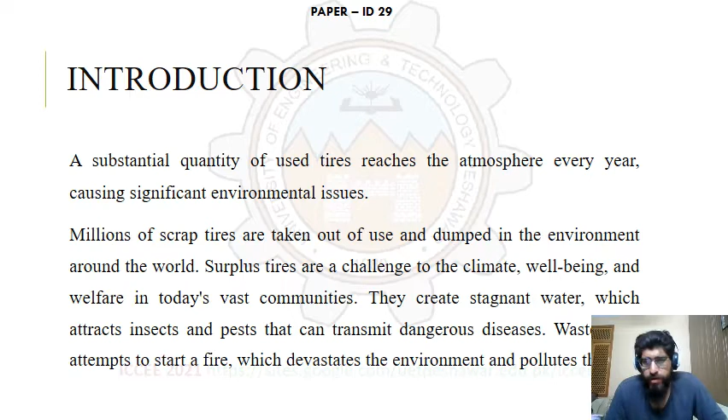As we know, tire use is increasing significantly every year, day by day, and the disposal of tires has become a major issue. It's both legal and illegal, and it's affecting our environment by causing some diseases, such as dengue, which can transmit, and also tires have fire-holding capability, which has been devastating our environment and polluting our air. So,

because of those effects on the environment, in the early 90s, civil engineers and researchers thought, why shouldn't we benefit from the properties of tires which are good in engineering aspects? So from the 90s, it officially started to benefit from tire chips in different ways. And today the purpose of our research is also that: why shouldn't we use it as a backfill material in our construction industries or in retaining structures?

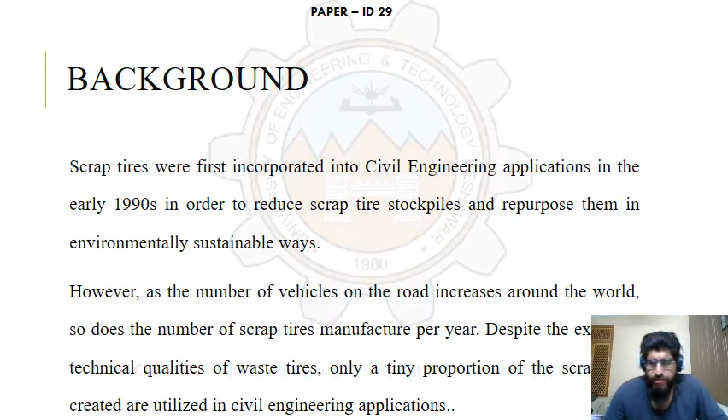So the problem statement, or the problem we have been facing, is that every time heavy backfill materials are used in construction industries or in retaining structures, which in turn increases the cost of retaining walls and other embankments and abutments. And the more critical reason is that we are using our natural resources for this kind of work. So in future we may face depletion of our natural resources.

So instead of affecting our environment and our climate by cutting mountains for sand and other materials, why shouldn't we use artificial material we already have, which is also affecting our environment? So the need for the research started from

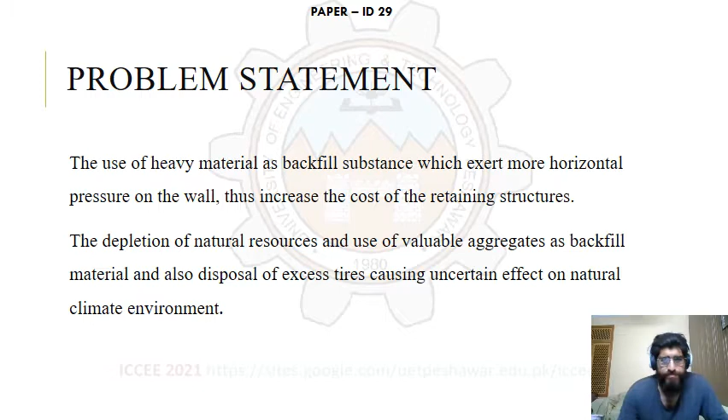this problem. And the objective of our work is to evaluate the shear parameters of sand-tire chips mixture by using direct shear and triaxial shear apparatus methodology, and also to compare and analyze both apparatuses' results, and also to use our proportion of mixture as a backfill material in retaining structures critically.

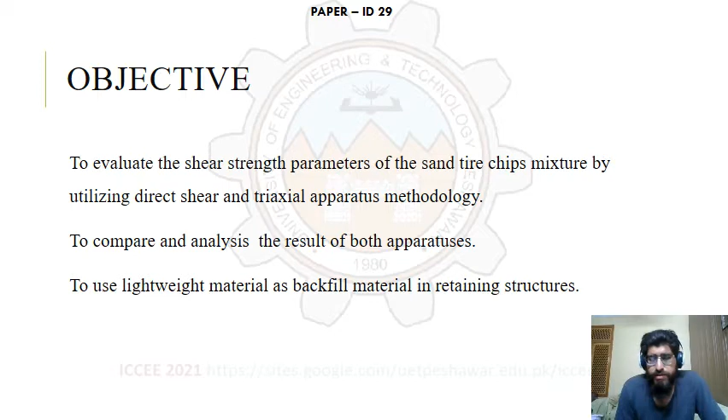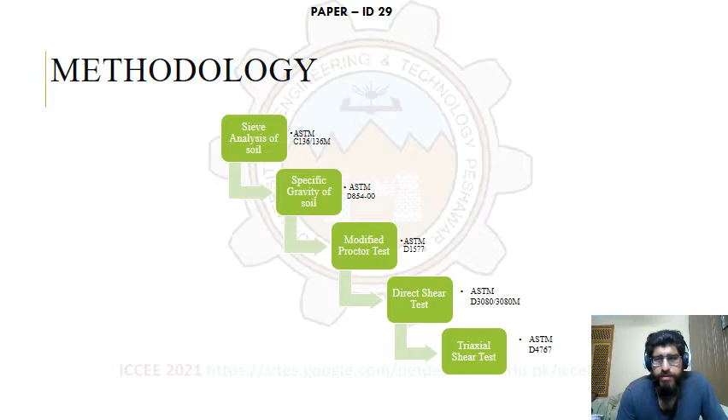To achieve our objective and goal, this methodology was used, and the values we observed from this methodology are explained in the next slide. So the specific gravity of the soil was observed as 2.67, and the soil was classified by the Unified Soil Classification System as poorly graded, because it was collected from a local construction site, where I was working as a site engineer.

So I thought it would be better to use the backfill material, the sand which we use in our construction industry. So I took it from the place where I was a site engineer. The dry density of the sand was observed as 1.75 grams per centimeter cube, which was calculated from the modified Proctor test, and for the direct shear the diameter was 52 mm.

Normally we use a square shape. I have mostly seen a square shape, but in our institute lab we got new apparatuses, and the direct shear was circular, and the triaxial was also of smaller size. So for the triaxial shear apparatus, the aspect ratio was 2:1, so the height was 72 mm and the diameter was 36 mm.

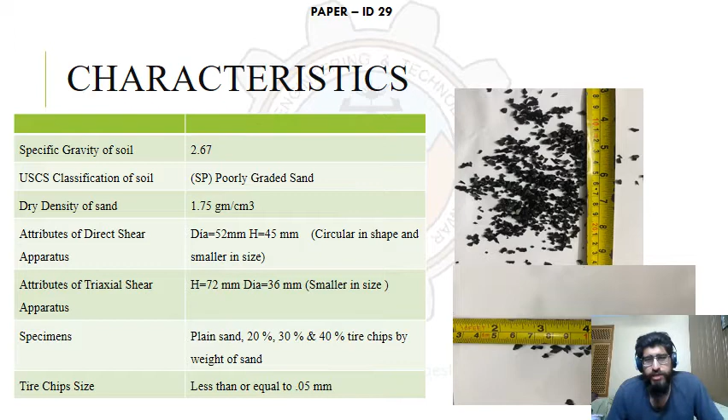For specimens we used plain sand, and 20%, 30%, and 40% tire chips by weight of sand. As our apparatuses were small, and as per requirements and standards, we used very small, tiny tire chips, whose size was almost equal to 0.05 mm, and the highest size was less than 0.05 mm. So these were the details of the material we used in our work.

But after that it changes, and we can observe that with the increase of tire chips, the maximum shear stress increases. Up to 30% shows the highest maximum shear stress as compared to 20% and plain sand, but at 40% it decreases. It's because of the segregation phenomenon.

As our shear box was small, and we know that tire chips are lighter in weight but have more volume as compared to sand particles, the particles segregate at the bottom. So because of that segregation phenomenon, with the addition of a higher percent of tire chips, the maximum shear stress decreases.

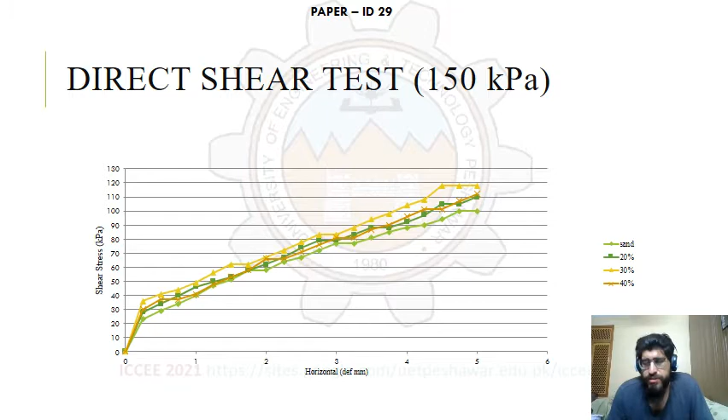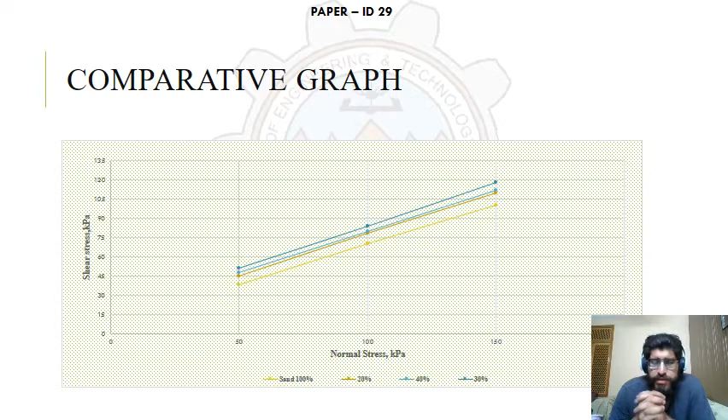Here is the comparative graph of the normal stress versus maximum shear stresses. So you can observe that sand has a lower value as compared to tire chips, but up to 30% it has more, then it decreases at 40%. Also in the triaxial shear test, three kinds of loading were applied: 50 kPa, 100 kPa, and 150 kPa, but as a confining pressure.

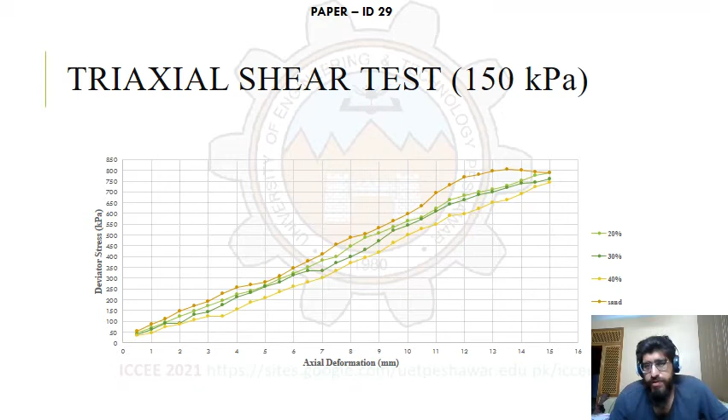So you can observe that the optimum value at 20% was observed, while with more percentage of tire chips, at 40%, it almost decreases. And because of this property of the tire chips of taking larger strain at higher deviator stress, we are able to use it in seismic areas. So because of its ductility and deformability behavior, we can use it in many geotechnical and earthquake engineering aspects, showing a really good behavior as compared to sand.

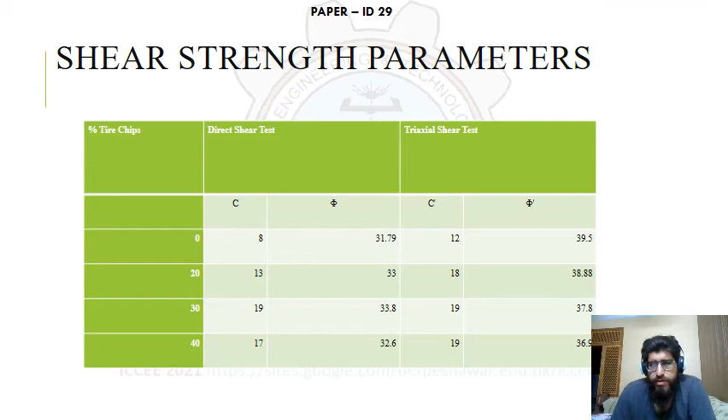So here are the comparative shear strength parameters of both apparatuses, cohesion and angle of internal friction. In triaxial, we have calculated the effective shear strength parameters, while in direct shear we have just the limitation of total. We can observe that with the increase of tire chips in direct shear, the angle and cohesion both increase up to 30 percent of tire chips, while in triaxial the cohesion increases with the increase of tire chips, but the angle of internal friction slightly decreases. So these were the parameters.

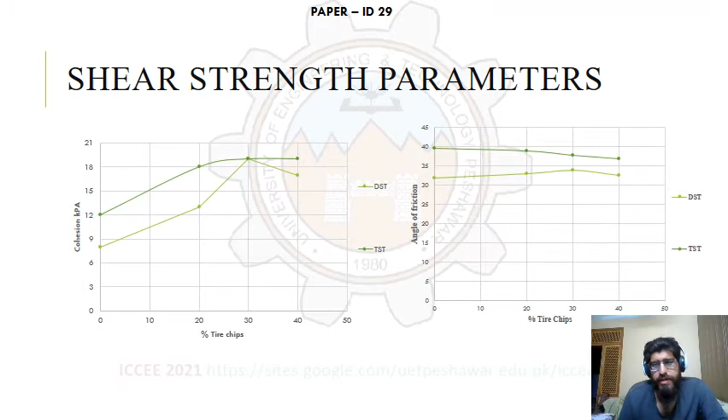So here is the graphical representation of shear strength parameters of both apparatuses. It was also described in the previous slide, but here you can see that 30% of tire chips is giving us the same cohesion value for both apparatuses, and the angle of internal friction is also explained.

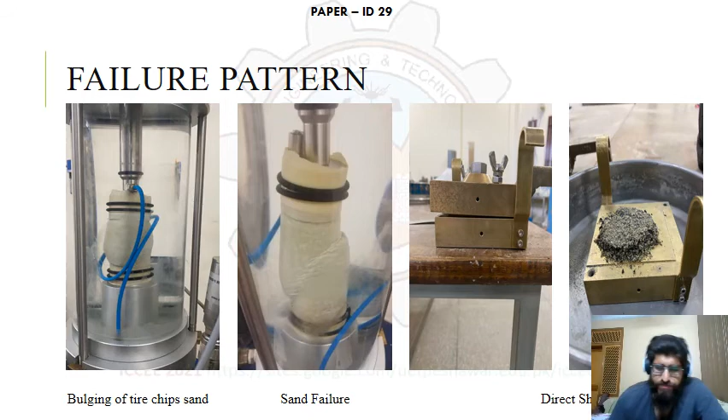So now we are getting into the conclusion. I won't take longer here because I have already explained almost my conclusion in the graphs, so I will make it short. The adding of tire chips affected the shear and even the deformation properties of the sand drastically and in a very effective way. And we can see that with the increase of confining pressure, the deviator stress value increases, same as for direct shear: with the increase of normal stresses, the maximum shear stress values increased. No peak stress was observed in the direct shear apparatus for all the specimens, while in triaxial, only for sand, peak deviator stress was observed.

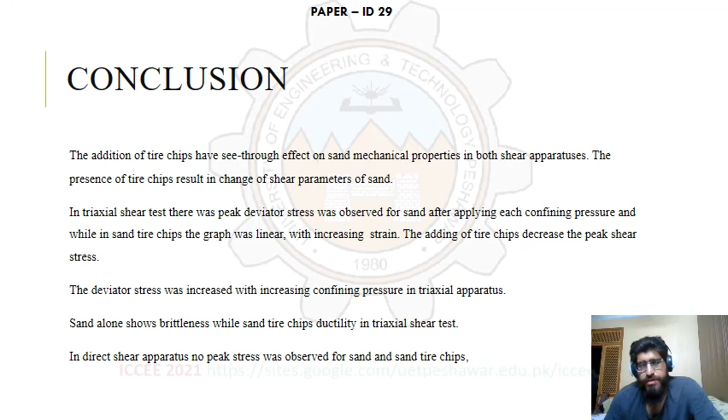And the other thing is that sand shows brittleness, while sand-tire chips show a ductile behavior, and you can also observe it from the behavior of its failure. These points were already discussed in previous slides, about the normal stresses and maximum stresses, which percentage performs well, and the failure of both apparatuses.

The goal of this work was to compare and observe the results visually and numerically, and we almost succeeded in getting our goal. And the second goal will be achieved when it is performed practically, because it will help us to build really economical retaining structures because of the light weight of the tire chips and better engineering properties, hydraulically and seismically. As we have seen, with the passage of time the seismic effect is getting more crucial, and we have to prepare ourselves not just building-wise, but also in retaining structures, because it can cause major losses if we don't put our concentration on these kinds of things seismically too.

So, inshallah, hopefully our goal is to use it practically too and make our work more valuable, so many people can benefit from our research.